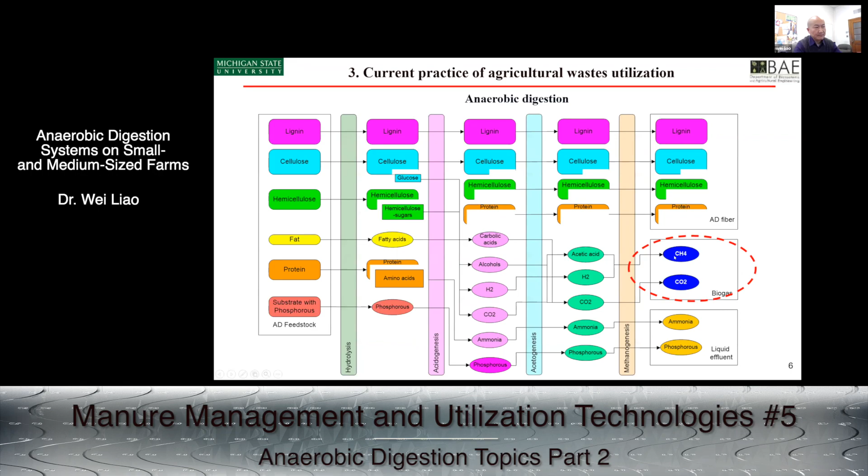And currently, for methane and carbon dioxide, sure, there's a lot of media coverage on renewable natural gas and biogas. We do the cleaning first, do biogas upgrading, and get renewable natural gas, particularly on the West Coast, California, Oregon, and Washington. They have similar regulations like the California Low Carbon Fuel Standard and those things.

So that's kind of the current process. But the route from biogas to renewable natural gas, even for electricity and heat, is very much for large farm operations. And particularly for renewable natural gas, you have interconnection, all those; it's a very tedious process to communicate with the utility company, and some of it depends on what kind of fuel you're talking about, D3, D4. You may need to talk to the petroleum companies.

Farms literally cannot do that. Small and medium farms especially cannot take care of this. They're already busy enough taking care of their own operations. Add this kind of layer of bureaucracy on top of that, no way they can handle that. So we need a solution for small and medium farms.

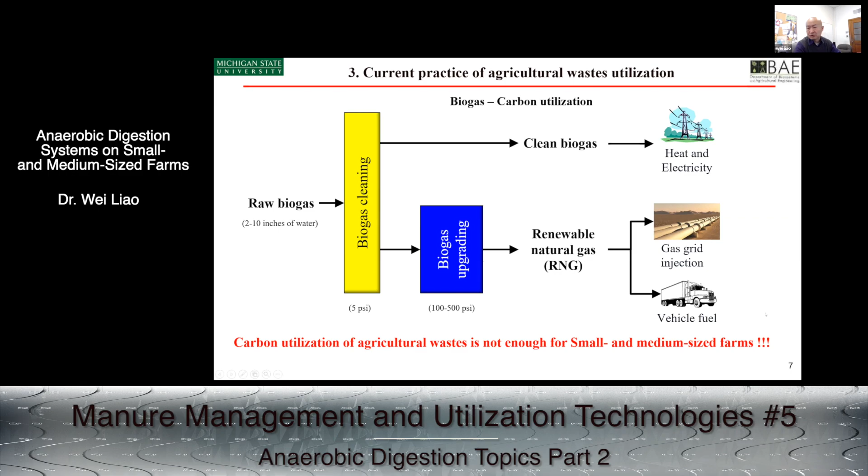Our digesters are smaller ones; we do digestion for a 200 dairy cow system, but we do mix with other feedstock. Our operation is more or less like a 700 dairy cow system because we mix in quite a bit of food waste. So this is current practice.

And then these are some numbers again from AgSTAR. Currently, and I think these are just last month's numbers, there are 331 agricultural digesters in the United States, very much on livestock operations. And internationally, if you think about our European peers, Germany, Italy, and those countries, our numbers are supposed to be bigger than 60,000 if we get everything right, and those operations are supposed to cover a lot of medium and small operations if the economics work out for the farms.

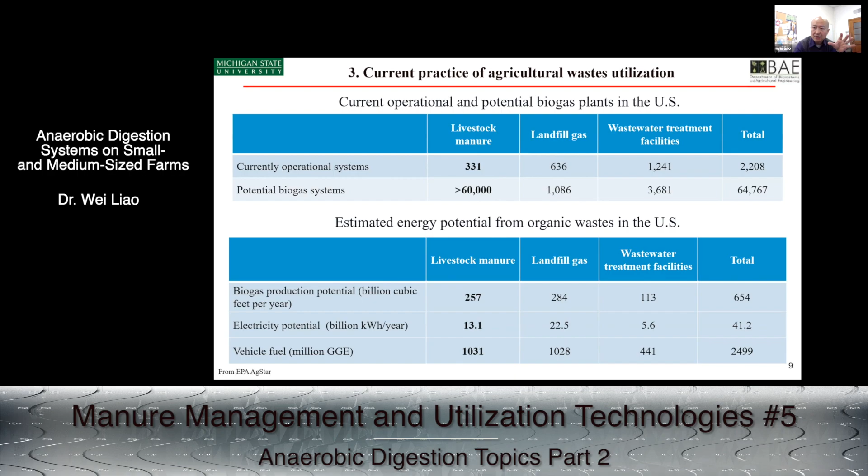And then these are just some energy numbers. If we increase to those numbers, we can really replace... Later I will talk about the carbon standpoint, the energy numbers, renewable energy, what amount of current fossil fuel use we can replace. So this is anaerobic digestion practice right now, and it's very much focused on biogas. It's very much carbon based in the process.

A lot of people around the world and in the United States are working on anaerobic digestion technology, and also on waste management and utilization practice. So this is one of the approaches we're taking at MSU, particularly for small and medium operations, because the feedstock amount is small for those operations, and correspondingly the biogas production is small. If you rely on biogas to generate revenues, sometimes the economics just don't work out, and you do need to focus on a systems integration standpoint.

Biogas carbon is one source; you do need to consider others, nitrogen, phosphorus, including water. You need to clean up the water, particularly in Michigan and Wisconsin, I think Pennsylvania too, because we are around the Great Lakes. And in Michigan, actually, the Department of Environmental Quality, EGLE, the local government, is trying to reinforce some regulation on agricultural operations, particularly water discharging. And clearly the trend is the rules and regulations will get tougher and tougher. So we do need to prepare our small and medium farms to be ready for those things coming.

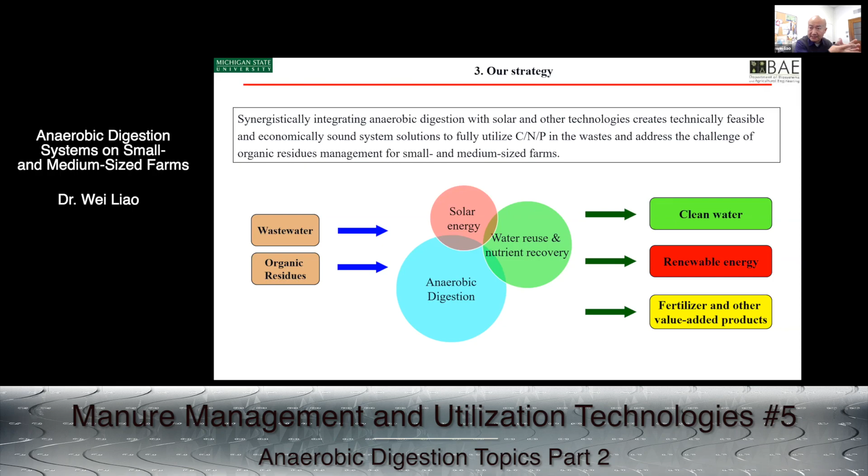We not only focus on the life cycle analysis, we not only focus on the global warming potential, but also water eutrophication, ecotoxicity, and those kinds of parameters. So that's getting into a little bit of detail on what we're doing at MSU. This flow chart integrates organic waste utilization, and we take anaerobic digestion, solar energy, water reuse and nutrient recovery together as a package.

We first jump into each individual one and talk a bit about our research and our pilot operation level. Then we jump into case studies: how could we link them together? Because again, small and medium farm operations each have their own operational characteristics. So we really need to tailor our combination of technologies to satisfy their demand or their operational traits.

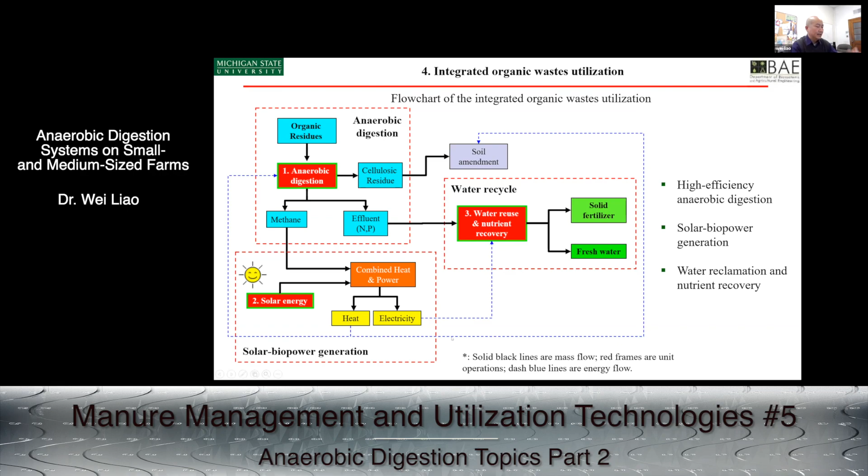So let's start from anaerobic digestion. We do a lot of microbiology, fundamental research, and we're trying to link those things to the applied side. We run the 16S DNA analysis, and right now we are doing shotgun sequencing for functional genomics. The intention is not just fundamental research. The intention is to really find out the communities, microbes, their interactions, along with all those operational parameters

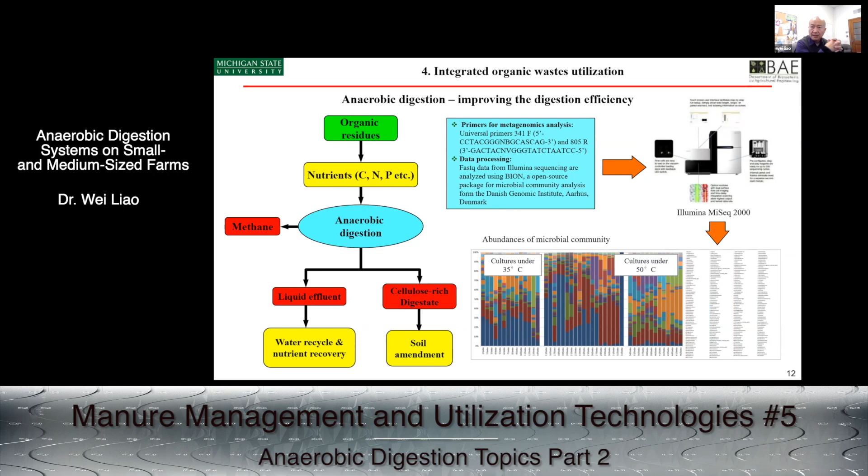to enhance the digestion performance. Everybody knows the biogas composition is 60-70% methane and 30-40% carbon dioxide by volume. But by weight, carbon dioxide is heavy and methane is light. Actually, literally in that biogas, you generate more carbon dioxide than methane in terms of weight. So this is the fundamental research part.

We do interspecies electron transfer studies and use conductive particles, nanoparticles, all that kind of stuff. The target is to flip that ratio by weight. We want more methane in the biogas and as little carbon dioxide as possible. We use different statistics, including machine learning and deep learning, to optimize systems. We put microbiology and performance together, and then we tweak the digestion performance.

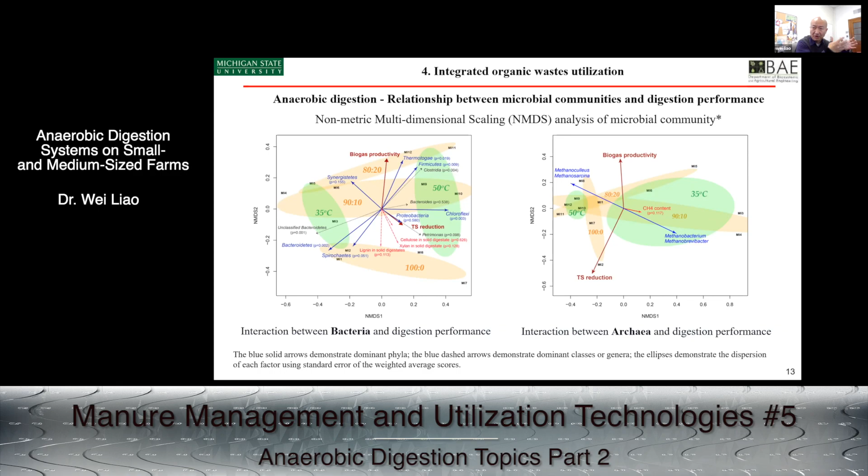We're trying to develop the next generation digestion technology without changing the configuration. We still use a CSTR. If you use a plug flow, just plug flow. With some additives or some operating condition changes, you can simply improve the methane production. That's very important for small and medium farms, because your feedstocks are limited. You want to use that carbon more efficiently than the large operations.

So this is some of the data where you see the methane yield from our operation. We mix a little bit of manure with crop residues and energy crops, switchgrass, corn stover, again trying to balance the carbon to nitrogen ratio. We also utilize particulate matter properties to enhance the microbial community and microbial activities. Towards the end, we generate more gas and produce high quality solid digestate as a medium.

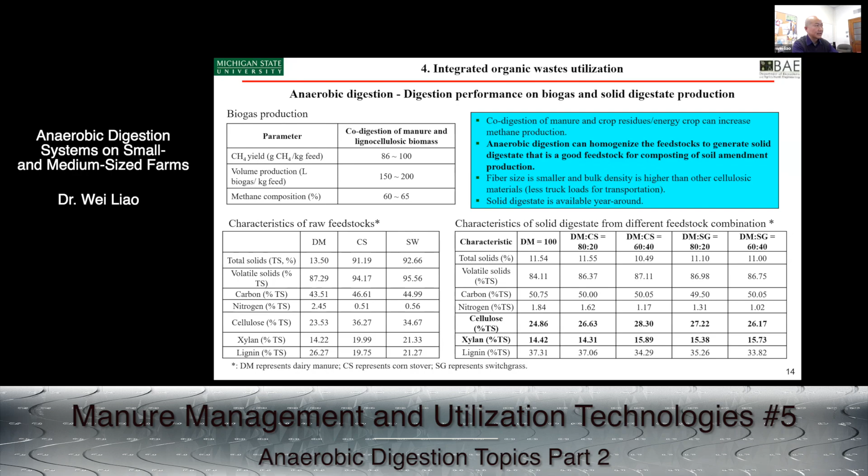The solid digestate could be directly used for soil management, and also as a medium to absorb more phosphorus and nitrogen for high quality soil management, which is some of our research. And then, of course, the liquid digestate. We want to get the total solids and COD level in the liquid digestate lower. Then we can apply water reclamation and nutrient removal technologies in the next steps. So that's the digestion part.

On the solar research, we're doing a little bit different. It's not only just the PVs and solar thermal, put them on, just provide energy. No. What we're trying to do is actually integrate solar and the methane reactors. Solar energy, everybody knows the characteristics. Like today, it's snowing in Michigan, no solar energy, right? Solar energy is coming and going. It's not a continuous energy source. They are intermittent. So how could we turn solar energy into a continuous renewable energy source?

There's a lot of battery storage. Say, okay, put in the battery. I have a couple batteries in my operations: 18 batteries, 50 kilowatt hours battery here. But battery is expensive, and also, to be frank, there's different opinions on the environmental aspects. You use a lot of rare earths, all those things. We want to use batteries for the EV cars, right? We don't want a battery everywhere. And you need to find different ways to store that solar energy.

Our concept: we use the solar energy, solar heat, to maintain the temperature of the digester at higher temperature, getting thermophilic digestion and better methane production. So we maintain high temperature through the heat exchange. We then turn that photon or solar energy into chemical energy, methane. We store the solar energy as methane energy, and then methane can be put in the bag, or even down the road, if you can do the compression, you can store it and transport it easily. So that's the whole concept behind the solar bioenergy research.

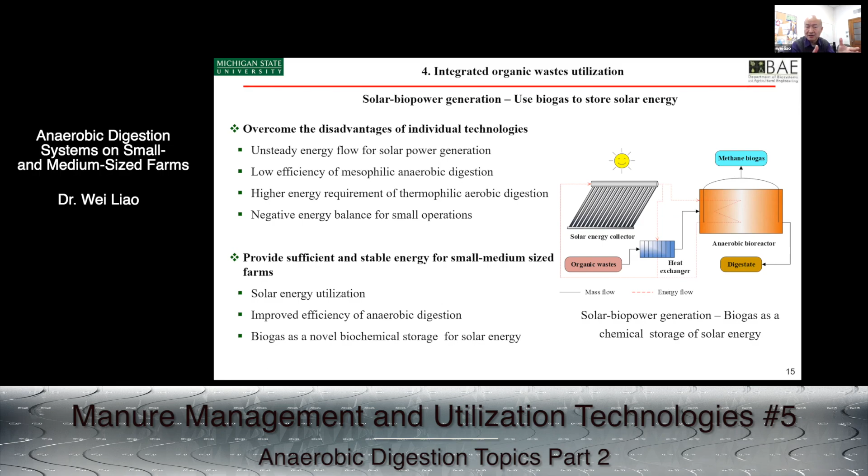And this is good for the small operation, because we're not talking about transporting them through the pipeline. We just say you can store them locally and use them later for EV charging, those kinds of things. And from this way, you increase your energy production for small and medium farms, and you don't need to spend a certain amount of the gas for the heating, because most of the heating comes from the solar energy. You store the heat in the methane gas, and you actually increase the net energy output for the systems. So this is what we do.

Running those pilot scale systems at MSU, we get solar collection year round. That's the typical trend, particularly in the northern part of the country. And then, of course, we started focusing on small digesters from 10 cubic meters all the way to 1,000 cubic meters. The 1,000 cubic meters is like half size of our operation. We have 200 dairy cow systems. We have a 2,500 cubic meter reactor. So very much we focus on small.

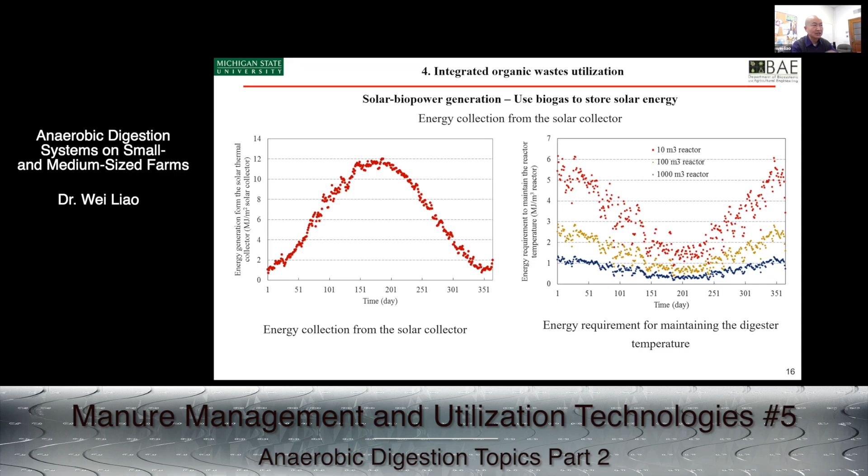If you look at this thermal reactor's heat energy demand, of course, summertime is a little bit low, wintertime is high. So we use a multi-objective optimization. We put these two things together, trying to find the best combination between solar and biogas production that can enhance the methane production and store solar energy in the methane gas, converting it into chemical storage. These basic slides show you the numbers, with parameters from solar collector area all the way to the net energy output.

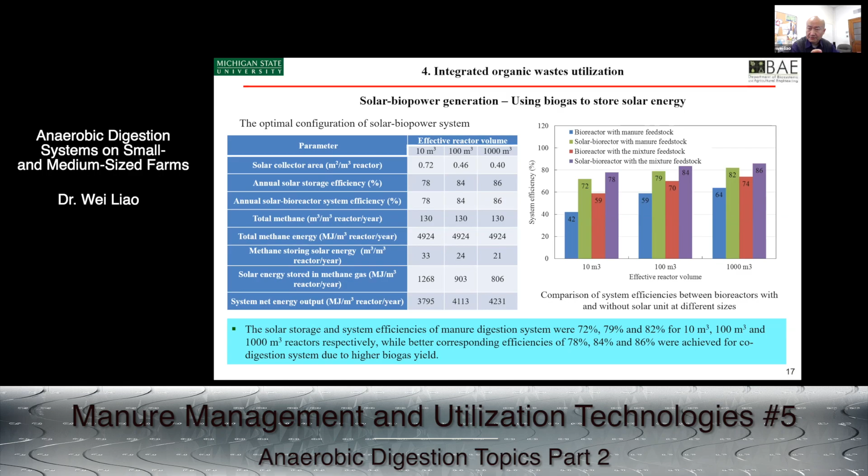We do the comparison of the bioreactor with solar, without solar, with mixed feed, without mixed feed. You can see that combining solar and bioenergy with co-feeding of manure and some food waste, we can simply enhance the system efficiency. From the energy production standpoint, from as low as 42 all the way up to close to 80, and for the larger tanks, efficiency a bit higher, 64 up to 80, 86, at least 20 to 30% increase in efficiency. That 20 to 30% increase is critical for small and medium operations in terms of their gas, their energy output.

So the next part, the last case of research, is about water reclamation and nutrient recovery. We use a small scale, because we do have solar energy, renewable electricity, available. We're trying to use electrocoagulation and a membrane. The purpose of using electrocoagulation is to reduce pressure on the membrane, ultrafiltration or nanofiltration.

And this is another new process we developed. We want to combine the electrocoagulation with the anaerobic digestion, because farm digesters, particularly for manure digestion, have pretty high hydrogen sulfide production, the swine manure type of things. So we want to use the electrocoagulation, the pH swing, to clean up the biogas and also enhance electrocoagulation.

We reduce the power demand, because we get sulfur into that, and those ions enhance conductivity and reduce energy consumption of the electrocoagulation, and accumulate particularly phosphorus. Electrocoagulation can remove 99.9% of phosphorus in the systems. So remove the phosphorus and clean up the water. And then of course, after that water is clean enough, we can run a regular filtration process.

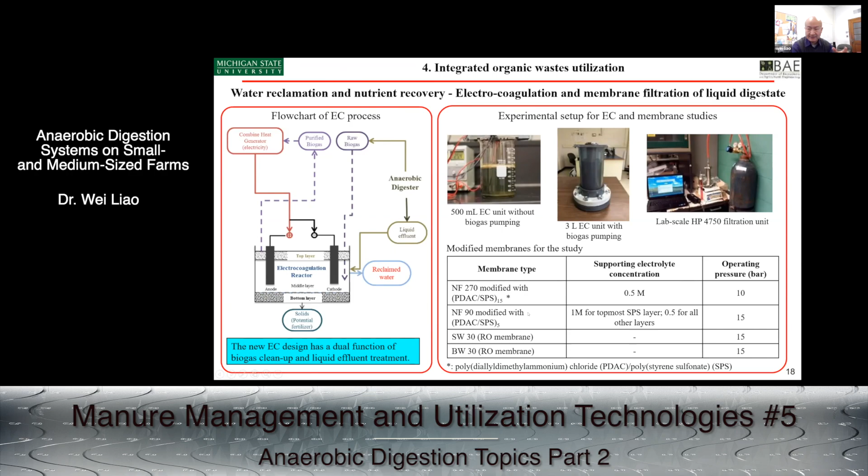So we did some membrane research with nanofiltration and reverse osmosis with different coating systems at MSU. We ran different tests here. Then you can see the water. Just want to show you this picture. These are the parameters of COD removal from EC. You can see from 3,000 milligrams per liter, a little bit dilute. The solid digester is 10 times higher. The recirculating systems are a little bit lower than that.

We can remove 90% of the COD, and with a combination of nanofiltration and the reverse osmosis system, we can really get clean water. This one satisfies the discharging standard. So you can see the dark black digestate and very simple 2 steps. And again, this technology is designed for small, medium operations. We don't need very complicated membranes, big pumps, that kind of stuff. Actually, just 2 membranes. One, the columns, the nanofiltration, and another 2 or 3 bundled, the reverse osmosis.

And actually, we can get rid of the reverse osmosis if you don't have that strict a standard, because based on the EPA discharging standard, both the quantity and quality are important. But in a small-scale operation, you only have a few hundred gallons, a few thousand gallons of water, feeding to different categories, different states, and different regulations. So actually, we can reduce a little bit of the complication of the membrane technology. Then we can get this clean water. You can direct discharge, and the semi-solid coming from the EC part is rich in phosphorus, a very good fertilizer for that case.

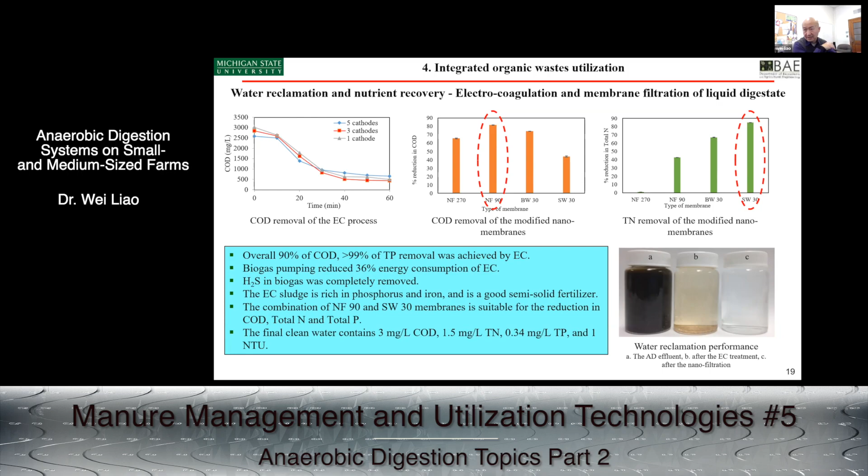So these are individual pieces. We work together, and again, I'm a systems engineer. We want to put those things together. I'll give you 3 case studies. So we're combining solar, anaerobic digestion, water reuse, and nutrient recovery. The first one is solar biomembrane-based systems for water and energy generation. It's a container-based system we developed. It's what we call a zero-discharge, zero-emission, energy-neutral system, putting the solar digesters, the electrocoagulation, and membrane stuff together in one single container for simple operation, to help them do the waste treatment and waste utilization.

The second case is actually for farms in Central America. We do have a research hub close to San Jose, in Alajuela, Costa Rica. So you see that we built a pretty big pilot system for small farms, with reactors and solar panels. And for that particular case, we use a wetland and a centrifuge to do the last steps of digestate polishing.

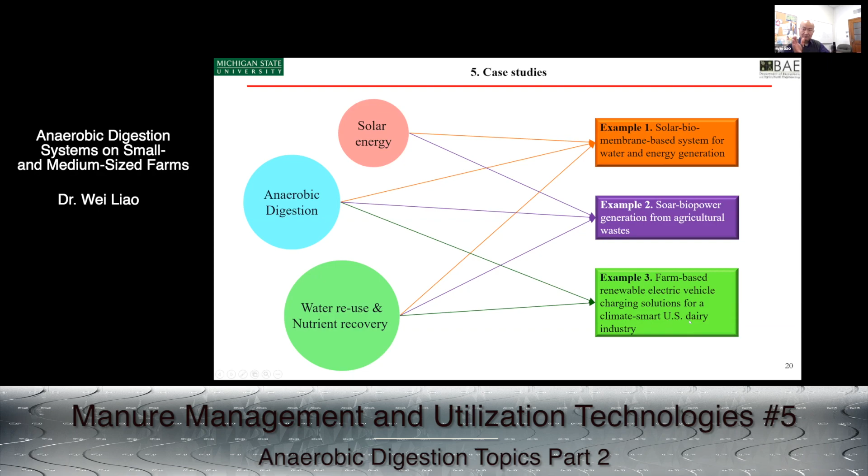And then example 3 is a newer concept we developed: farm-based renewable electric vehicle charging solutions. I think John is probably going to mention it a little bit on the next slide. John's on the team to put these things together.

So the first example, the solar bio-nano-based system for water and energy generation. We put everything in this 40-foot container, and we put a solar panel on the side to generate the energy. And you can see there are two 400-liter upflow fixed-film reactors. We put packing in there to enhance biomass accumulation. And this one is the EC, the first generation of the EC we developed, 400 liters. Right now we've actually developed a continuous EC process, and the reactor size is much smaller. And right now we're getting to the third generation EC for waste utilization.

And then the feeding systems, gas bag, and we have an energy center to control the solar energy and biogas energy, managing those to create a continuous energy flow to support the systems. And of course, we have a battery in this case for research purposes, because in the winter in Michigan, we have on average 160 cloudy days, mostly in the winter months. Sometimes we don't have sun for 3 or 4 days. So we need a battery to bridge the energy gap between sunny and cloudy days. And we also work with an engine company on things like how complicated it is running the engine on biogas, oil changes.

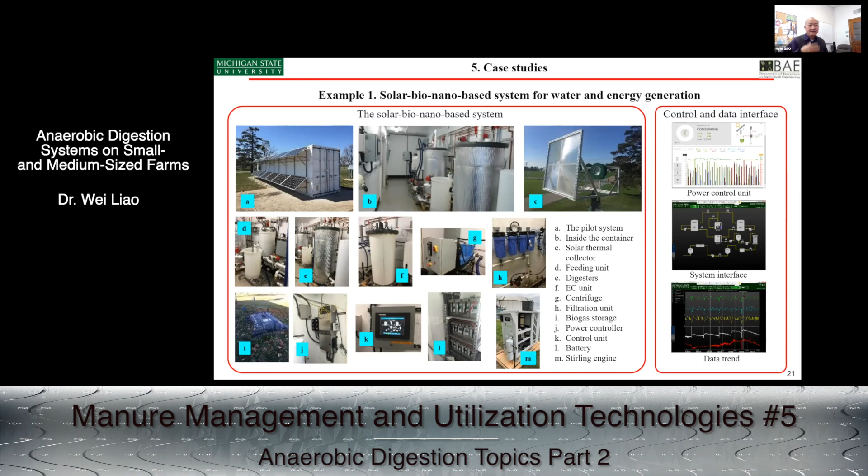And again, for the small and medium farms, we really want automatic systems. You don't want a dedicated operator operating the systems. So we do all those programs: simple programs, monitoring systems, control systems. Even right now, it's pretty typical. You just use a cell phone to do everything. We are going in that direction.

And then again, as engineers, we need to do the energy and mass balance to see the overall performance of the systems. So we just use blackwater and food waste together. This is a system designed for that case. And again, the test unit is very small, 60 liters per day. And we generate potable water, and we do have the solids fertilizer and semi-solid, like sludge.

And then we have rejected water; we're doing recirculation. And the energy balance, you can see, overall on a cold Michigan winter day, we can generate around 5 kilowatt hours of electricity per day. Again, this is a pilot unit, it's small scale. But overall, for certain farm operations, we do have filtration units with a commercial housing. And we do our own coating on this kind of membrane to do filtration.

And then, yes, the systems are going to work, conceptually, combining them together. Of course, the system is still a little bit complicated. This is the first generation of those systems. So currently we have a second container, an upgraded version. We simplified things and made it much bigger. Right now we have those 3 cubic meters, and we can handle 200 gallons of waste streams per day.

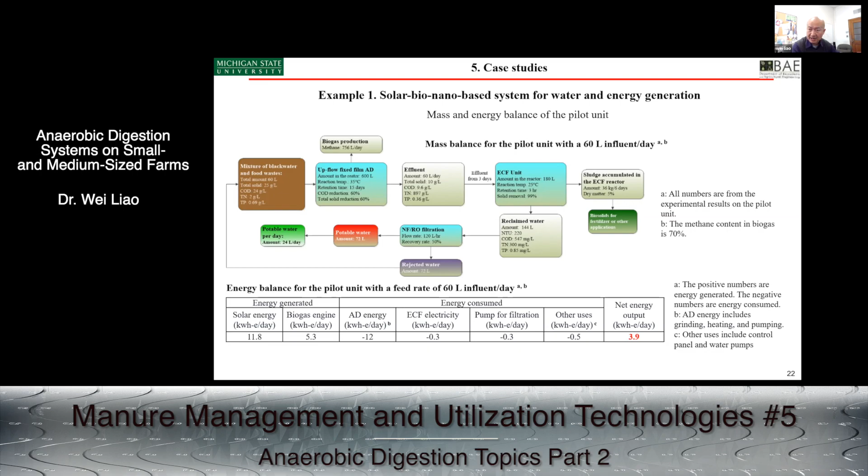But this is the first pilot. We proved the concept, and at this level, we put everything together, and we can have a positive energy output. And the second one is a little bit bigger. This is for the full farm, for real farm operation in Costa Rica, Central America. We built our research hub 10, 12 years ago down there, using the Department of State's funds. And then we built the system with the solar collector. One thing I have to mention is everything we did over there, we built locally. We didn't ship anything from the United States down to Costa Rica.

The digesters with the gas bag and engine. The only thing is the engines. This is a 16 kilowatt engine unit. Actually, Costa Rica is a tiny country, 5.5 million people, so they don't have the entire industry chain there. So we did purchase from Brazil.

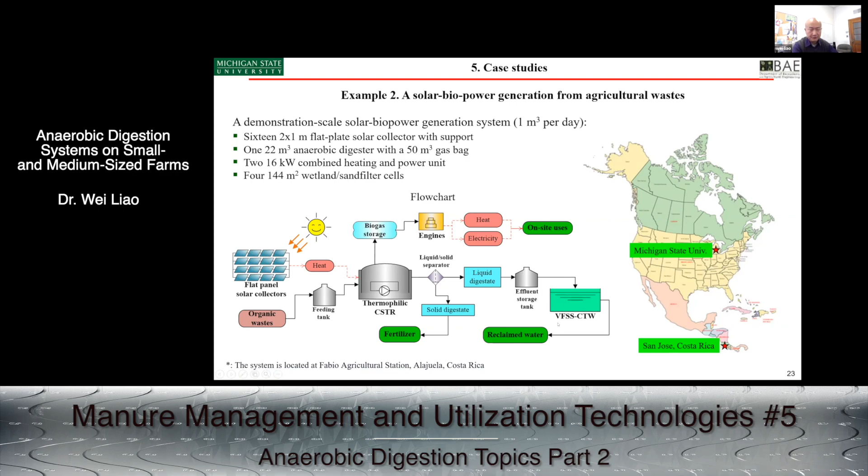And then we do have a wetland on the farm site to clean up the water. We want to take advantage of the region. So this whole system is thermophilic because it's hot there, so we raise the temperature a little bit higher. And a flat solar panel, and then we have energy utilization, and the solid digestate we use on the local farms. On that experiment station, you have different crops, and then we go through the vertical constructed wetland, and then the sand filter, and reclaim the water.

So this is the system in Costa Rica. We have a solid feeding system because we receive manure like chicken litter and some swine manure, and then a lot of tropical fruit residues: papaya, mangoes, pineapple, watermelon, those things. And we have a grinding system, so chunks get ground small and pumped to the buffer tank.

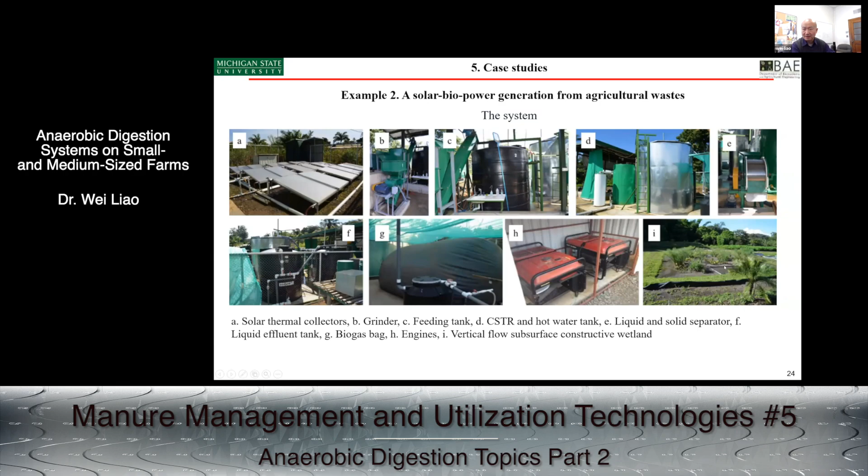And this is our main reactor, a 22 cubic meter reactor. And then this is the solid removal. After digestion, we get semi-solid residues out of that, and this 50 cubic meter gas bag stores gas for 2 small engines, and the polishing sand filter and wetlands are there, polishing the water. So this is the data. We monitor everything: energy, temperatures, input and output. You can see we do the comparison.

Actually, we have 262 megajoule net energy output for the whole system year round. We ran those systems; we shut them down, I think, 2 years ago during the pandemic, and over the 6 or 8 years of operation, the average numbers are like that here. And you can see the water towards the end; this is a sand filter. We do have some suspended solids in there, but the water is clean enough to be used back on the field as irrigation water.

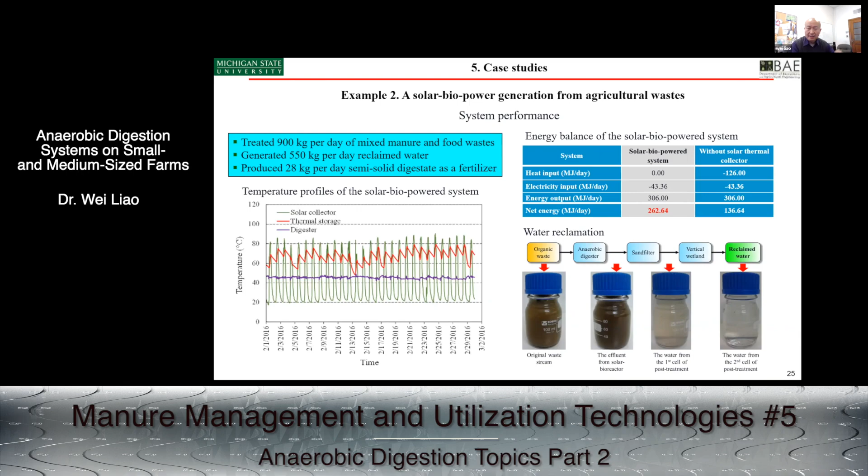So then we collect all those solids. This is 1 metric ton per day feeding, so it's a very small operation for small, medium farms. And example 3, the last one, is a newer concept we developed called farm-based renewable electric vehicle charging solutions for the climate smart dairy industry, focused on dairy.

As mentioned earlier, 45% of the gross carbon in the forage fed to cows ends up in the manure. And if you look at greenhouse gas emissions, the manure accounts for roughly 1/3 of the global warming potential from the dairy industry. Then we did a calculation. Considering not only big farms, but particularly small, medium dairy farms, we put them together using these technologies, and that would generate electricity. This time we don't put it on the grid. We develop a local, or what we call regional, off-grid charging network, charging stations.

Charging electric vehicles. I don't know how many of you have EV cars, but fast charging stations right now are roughly 30-35 cents per kilowatt hour national average. Compare that to 10 cents per kilowatt hour for grid power, and you get 35 cents, 3.5 times higher. Then, Juliana, you can run some life cycle analysis or economic analysis: just a 3.5 times increase of the price changes the entire game for the digestion industry. So this is why we work on it. We do have a little bit of USDA grants to support some preliminary research, and we did some more calculations on that case.

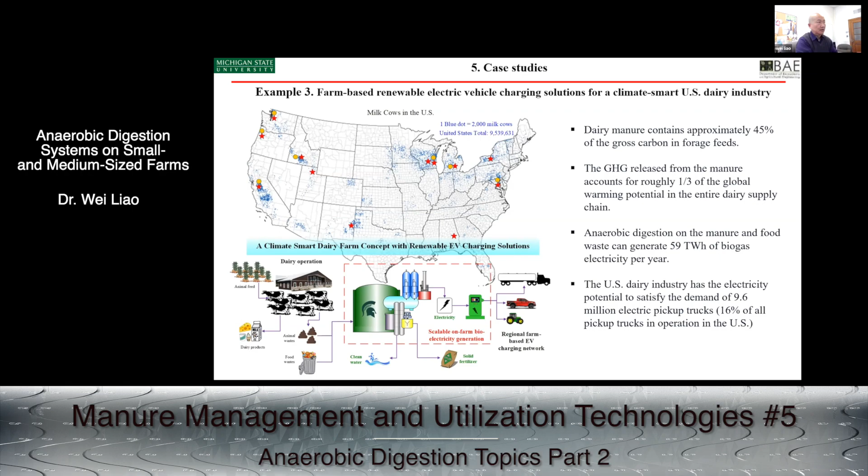The question we ask is, can we build a network? We work with the local utility companies, trying to use their grid. They are eagerly looking for solutions too, because Michigan is the car state, the auto industry state, so very much getting into EVs. And we want to give an example for the rest of the country. Can we put renewable electricity and EVs together, hand in hand, literally putting the auto industry and agriculture industry together? That's the last case study. This is newer research, and we are putting a lot of effort into it.

So again, the conclusion is, for small, medium farms, we need solutions, and very much integrated solutions. It's not only focusing on manure or other things. We really need to put all the nutrients, all the waste streams together: manure, carbon, nitrogen, phosphorus, including water too. And of course, anaerobic digestion plays a pivotal role, a key role in the whole system. Then the other technologies: I gave you examples of electrocoagulation and membranes. We also do electrodialysis and other biological processes to do the polishing work.

And again, with small operations, we have so many different variations. We really need to give them the tools in the toolbox, and let small, medium farms pick and tailor those technologies to satisfy their operation. That's a key point for the whole small, medium size utilization notion.